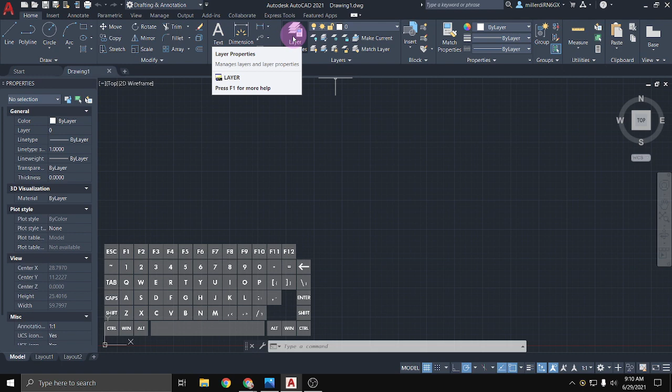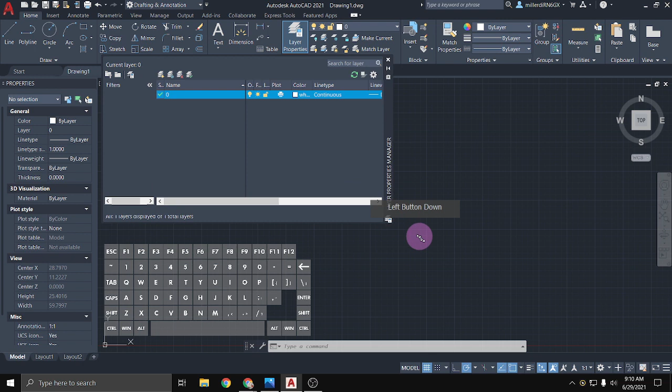So to add new layers into my project, I'm going to click on Layer Properties, and that'll open up the Layer Properties menu. I can click on this side part and drag it to move it around. And if yours starts off a little bit smaller, you can just hover over the bottom corner until you get that little diagonal drag, hold, and you can make it larger. So within here, we can make new layers, and we can control some of the different features associated with them, such as the color, the line type, and the line weight.

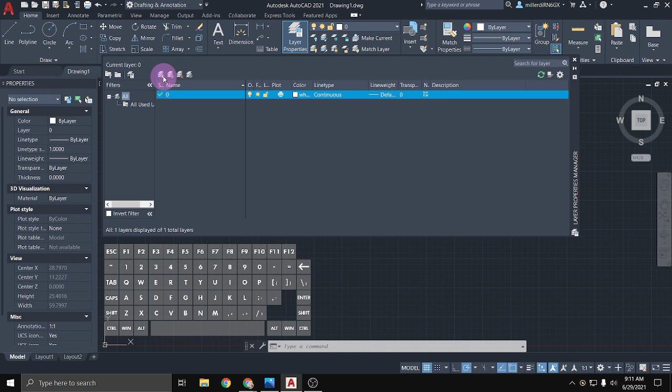So to make a new layer, you're going to click on this button here, and if I hover over it, we can see that it's the button for new layer, or I can hit Alt and the letter N on my keyboard. So that's another little trick regarding your certification exam: if they ever ask you something and you're not sure what the button does, anytime you hover over a button without clicking on it, it'll tell you what the button is. So if I click on that, it makes a new layer. By default, they call it layer 1.

So I'm just going to call this my object layer. So this is going to be the lines that I consider object lines in my drawings. And I'll just click off that to stop typing in there. If I wanted to rename it, I could do what I call a slow double click, which is I click, but you leave like a second or so in between. Or if I right click on the layer name, I can rename it, and we can also see that there's a keyboard shortcut of F2 to rename it. So a couple of ways we can do that.

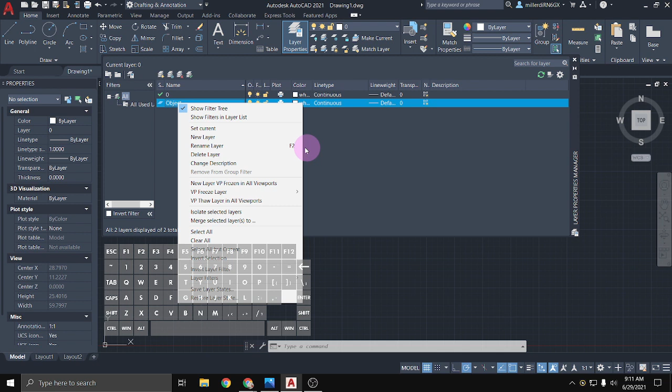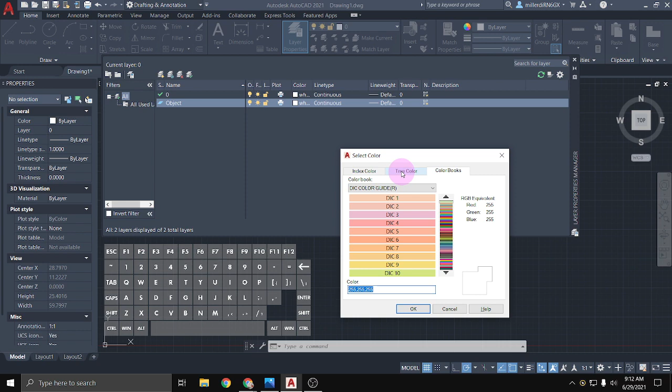Then I can control whether or not the layer is visible, which, like I said, we'll go over in the next video, and if it's frozen or locked. This setting right here will control if that layer prints or not. Then we have the color of the line, and all I need to do to change something like that is just click on it, and then I can pick a color from this menu here, or there's even a couple other menus of different colors. I'm just going to leave this one as a white line. Its line type I'll leave as continuous, and then its line weight. So again, just click on it, and then we can scroll to find the line weight that we want.

So then to make another new layer, I'll just click on this button here again, and this time I'll make a layer called hidden, and I'll just click off of that to finish naming it. This time I'll change the color, and I'm going to change the color to a light gray, just to show you how to change things.

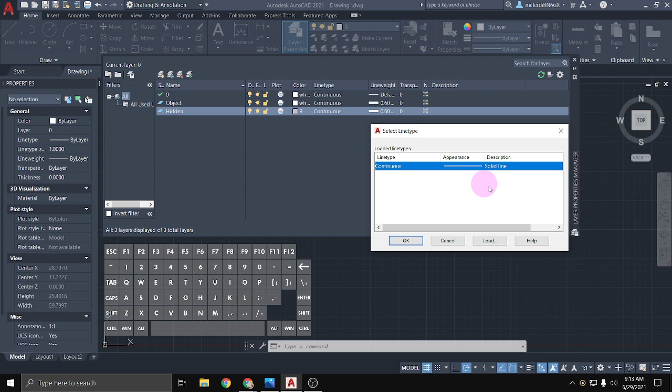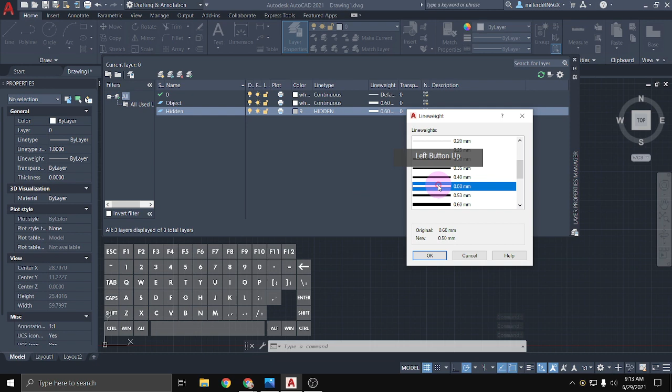And I'll change its line type, so I'll just click on where it says continuous, and just like with those properties, I'll have to click on load, and then I'll scroll down in this list and I'll load in a hidden line. Okay. And then I have to come here and click on it again. Okay. And I can change the line weight. Our hidden lines are usually a little bit thinner than our object lines, so I'll change it to be 0.5. And again, I'll make another layer, and I'll call this one dimension.

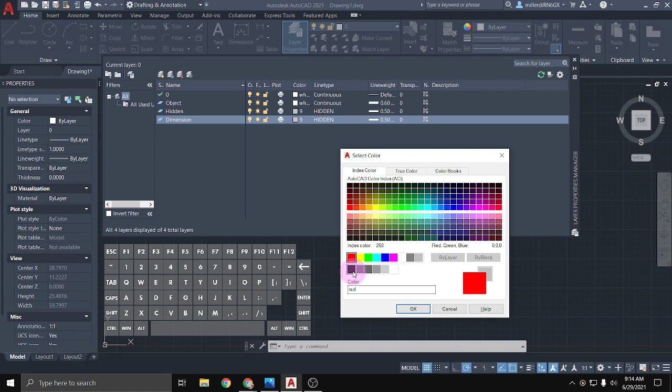And I'll change this one's color to red, just so it will be easier for me to tell the difference in my drawings between dimensions and the rest of the drawing. I'll change the line type back to continuous, and I'll change this line weight to be thinner. I'll change it to be 0.35.

And I'll make another layer too, and I'll just call this one guidelines, or rather I'll name it Defpoints. And I'm gonna make the color, I'll make it this dark blue just because it's kind of hard to see the dark blue on the black screen. And what we can see here is that when I called it Defpoints, see how that little plot button got grayed out? That's because this specific layer has to be something that's an invisible line.

So, and let me make it thin too. So that means this layer is going to be guide work that if I go to print or plot my drawing, this layer won't print out. And I can even show too that if I just call it guides, enter, I can make it where the layer doesn't print.

So even if I just didn't want to necessarily call it Defpoints, but I wanted to call it just like guide work, if I have it where it's got that little no symbol next to it, that means that anything I do in that layer won't print. So I can do a lot of guide work, set the drawings up, maybe align different views in that layer, and not have to worry about erasing the lines after the fact because that layer doesn't print.

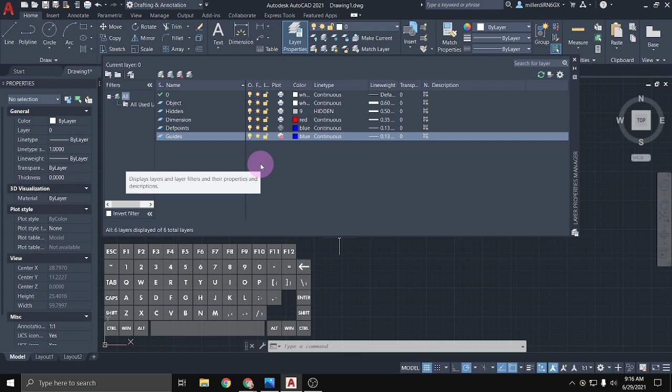So now that I have a couple of different layers set up, I've got their colors and their line types set up, and I can load in more line types for more layers if I needed to. For right now, just to practice, we've got a couple in there, but if I was doing like an architectural drawing, I'd have a lot more layers in there with a lot more different settings.

Particularly in architectural drawings, we use a lot of layers with a lot of colors to just kind of help easily distinguish those colors in there. Because since we're working with such large scale drawings, defining the line weight here isn't as useful as using different colors and then referring to something called a color plot table where different colors print as different line weights.

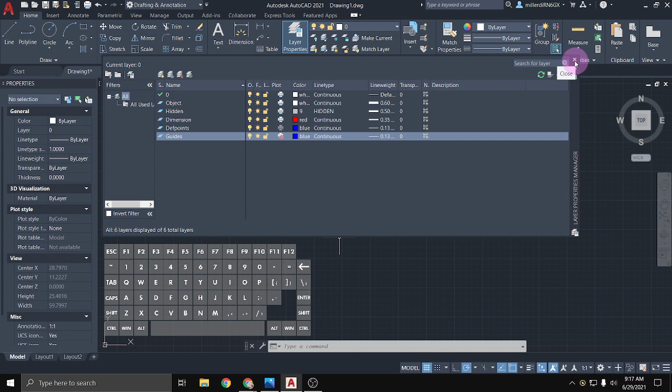So I'll just X out of my layer properties manager right up here. And now if I come to this drop down, so if I click on here, I see my different types of layers. And all I have to do is click on one of the layers, and I can see here that it changed my properties bar to just say that, well, it's doing the color by layer, it's doing the line weight by the layer, and it's doing the line type. Versus if I switch over to hidden, we can see that all three of those changed.

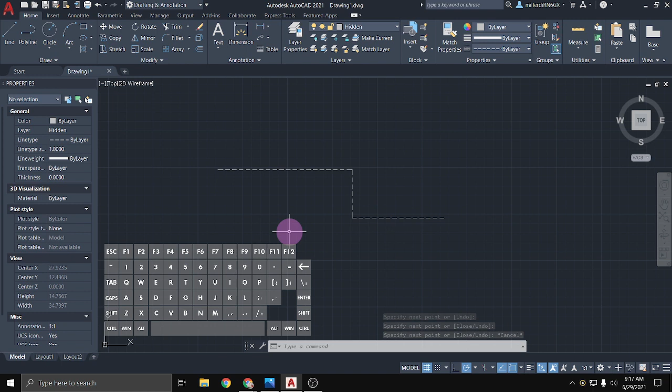And if I go to draw a line, I'll just draw a small line across. It's automatically a hidden line. I don't have to worry about switching any of those features or things up. The only thing is that I can't see the line weights currently, and that's just because I have that setting turned off. And so that's this little button down here, or keyboard shortcut LW display, as we can see it says. And if this button isn't there, you just click on this little customization, and then you can make that button appear or disappear in the settings toolbar.

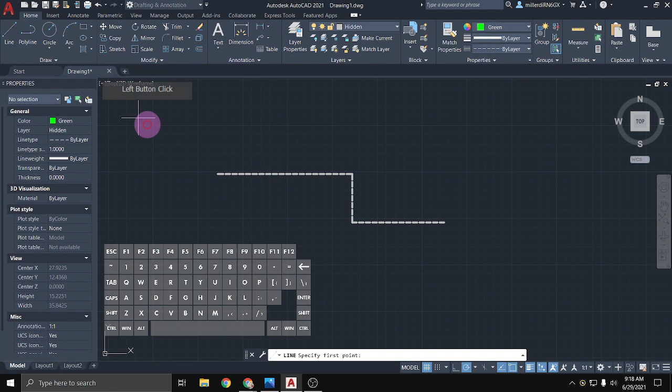So now you can override some of these things, so that's why it says by layer. But let's say I wanted all the features of a hidden line, but I just wanted it to be a different color. I can come here and say, okay, but I just want it to be green. And that's why it no longer says by layer, it just says green. And if I go to draw a line, it'll have all those features, but it'll be green.

Now, the issue with doing something like that is just that you have to be careful and remember that you might have changed things like that, because then I could go into the dimension layer, and it did switch me over to dimension because I clicked on it, but it still is going to make the line green because I've told it to override whatever I'm doing and just make green. So you just have to be a little careful about that.

So one thing I try to do as much as possible is just to switch over my layers rather than switch over my properties here, because now that it says by layer, if I switch layers around, it'll just switch all of the different settings associated with it.

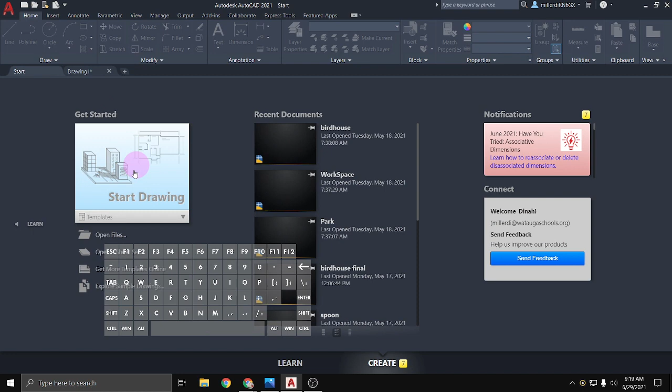So one of the benefits of layers is after you set them up is oftentimes you're going to be using the same properties and the same layers over and over again. So you can set up what's called a template file. So if I go to the start page here, a lot of times I'll just start a drawing by clicking on this start tab or clicking on start drawing here. And let me move the keyboard out of the way for a moment.

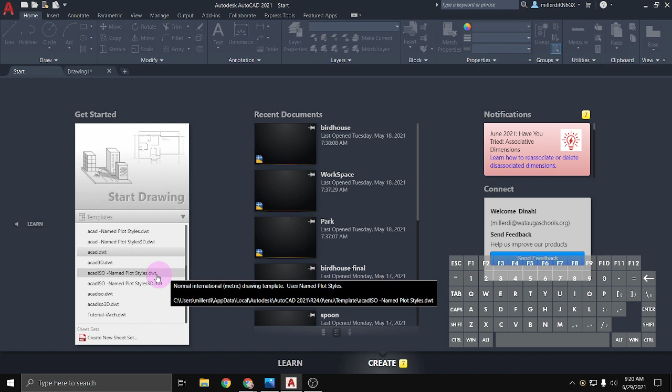But if I click on this word templates here, there's actually different types of templates that I can use to make drawings. So for instance, if I go to this, where's the architecture one? This Tutorial-iArch, this DWT file means that it's a template. So it means that it's going to open up a completely blank drawing. However, it's going to be set up for some architectural style drawing.

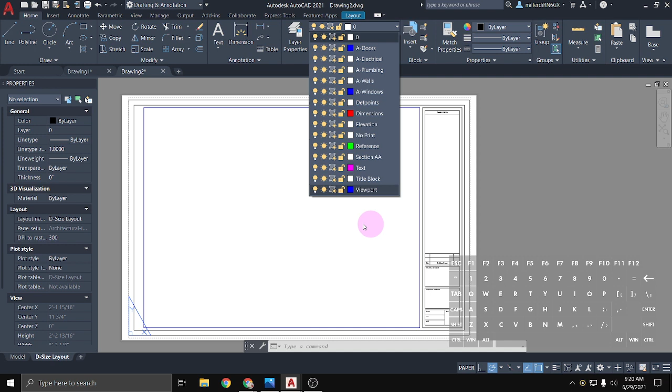So it already has a sheet set up with an architectural title block, and it also has several layers set up for us automatically, so we don't have to go and add those layers in every single time we make a drawing. Right now what we're in is called paper space, and we'll go over that at the end of the module, for just getting ready to print things out.

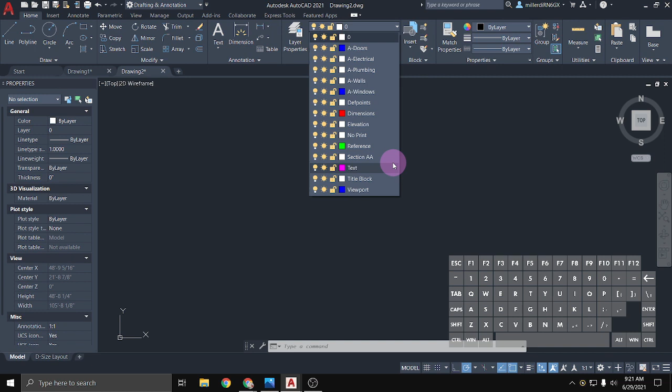But if I just click on this model tab down here, I'm back in model space. And I'll have all of my different layers where I can go and draw in my walls, my plumbing, my windows. And it has a couple of different settings associated with each one of those layers. If I go back into my own drawing, drawing one, and let me just move this back over here now.

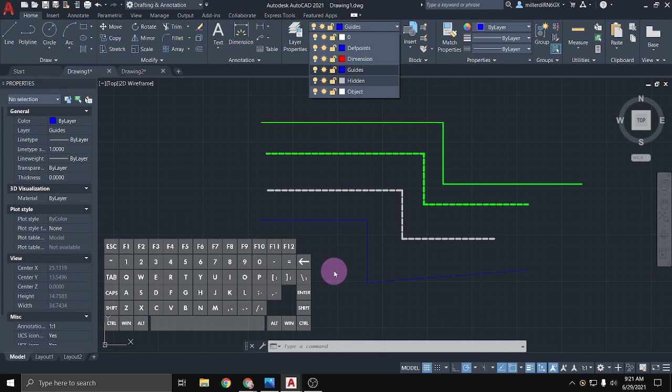So if I go back into my own drawing, I have all of my lines, all of my layers, but maybe let's say I even wanted to have it set up where I already had these guidelines in here for whatever reason, or maybe I have just kind of some drawing references that I want to be able to easily copy and paste into other drawings. And I want all of these layers into all of my drawings.

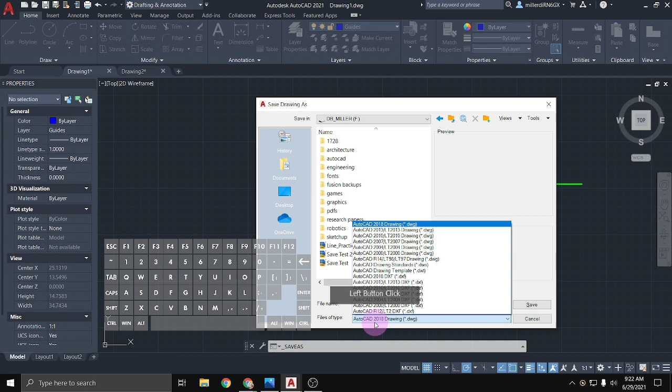I can actually save this as a template file itself by clicking on Save As, making sure that I'm saving it to my flash drive, and then changing the file type at the bottom to an AutoCAD drawing template, a DWT, and then it just bumped me back into the template folder. So I'm just going to click up here and again just say I want to do it on my flash drive, and I'm just going to call it template,

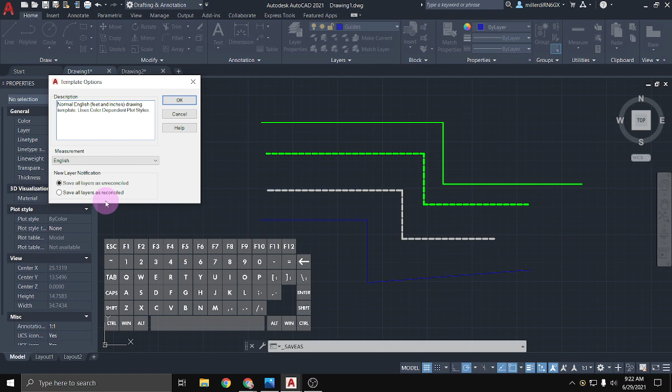and I'll click save. And it's kind of just asking, how do you want to describe this template? And I usually just click OK. I don't change much in there. So what can be useful with this is now,

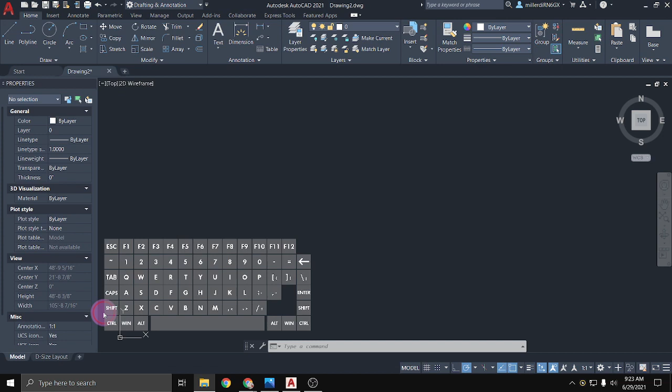if I just go to start a new drawing with that, so if I go to my flash drive and I just double click on this template file, it opened up a brand new drawing, so it called it drawing 3, and it has all of my layers in here automatically and any line work that I put down in that template. AutoCAD will automatically open up the very last template you ever used. So if I just click on this new drawing, it's just going to continue to open up that same template file, even if I put a bunch of new lines in here.

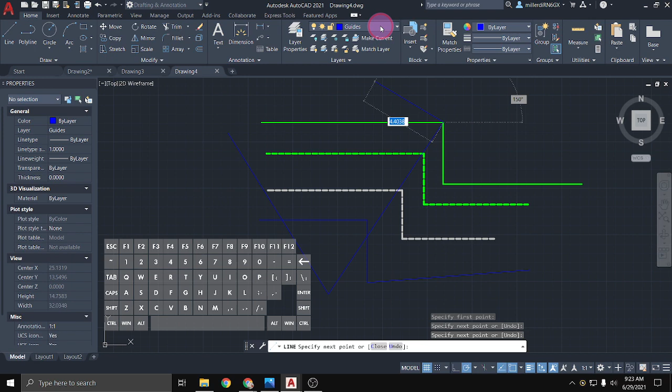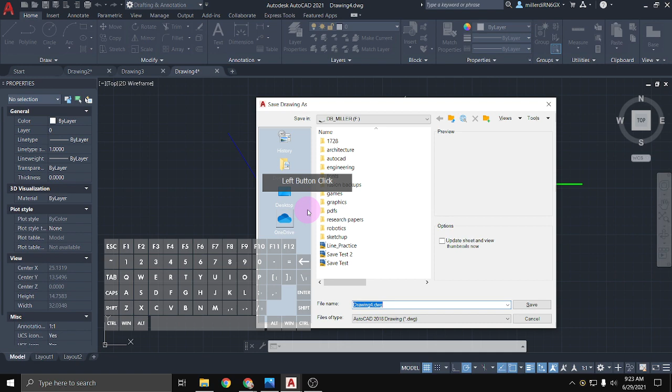And let me switch myself over to a layer that's just a little easier to see me put lines down in. So if I put a bunch of new lines in here and I hit escape and I close it, and even here I'll say sure, save changes to drawing 4. So I'll save a copy of this drawing. Now when I click on new, it still doesn't care that I put all of those different lines in there. It just opened it up with whatever I had it saved as when I initially saved it as a template file. So that's where templates can be very helpful.

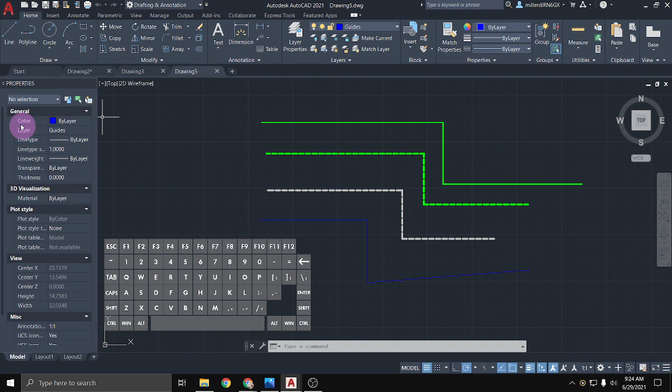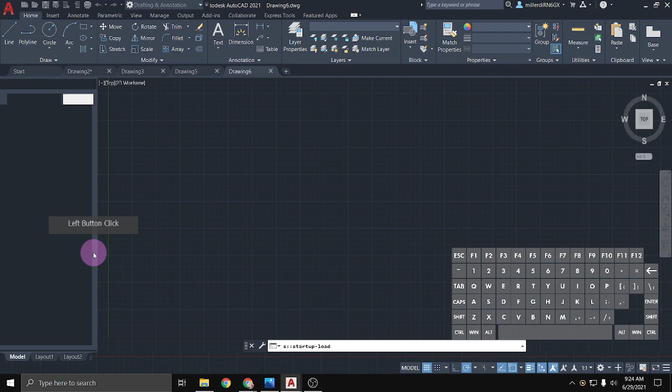And if you ever want to get out of your template and just get back to a completely blank AutoCAD drawing with no layers, no line work in it, no settings at all, you'll just come to the Start tab. And again, the keyboard's in the way. And just click on the word template, and you'll want this one just called acad.dwt. And that'll open up a completely blank, fresh AutoCAD drawing with no settings or layers installed. And then every time you click on that plus tab, it'll always open up a completely blank AutoCAD drawing with no settings done or layers done.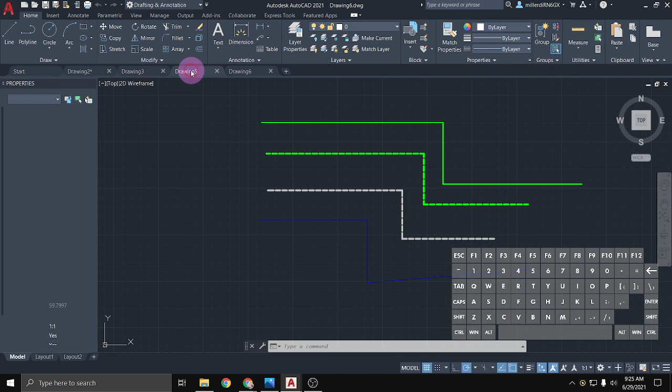So for your assignment for this particular step in the module, there is a file for you to download where it just has some instructions of different layers and settings for your layers to set up. So you're just going to go and fill in as the table instructs you to and create different layers with the different plot settings, color settings, line types, and line weights. You'll save it as a template file, and then you will upload it to Canvas to submit for grading.